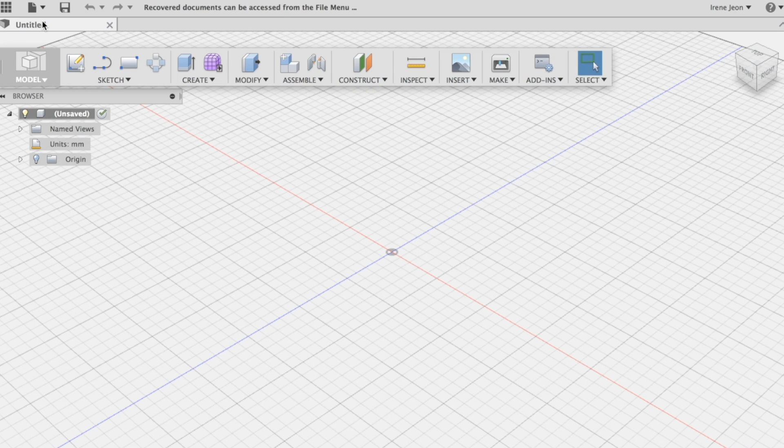So let's get started. I'm going to be using the top plane to make the sketch. I select the plane that I want to work with, which is the top plane. I want the pendant to be about 10 millimeters by 10 millimeters.

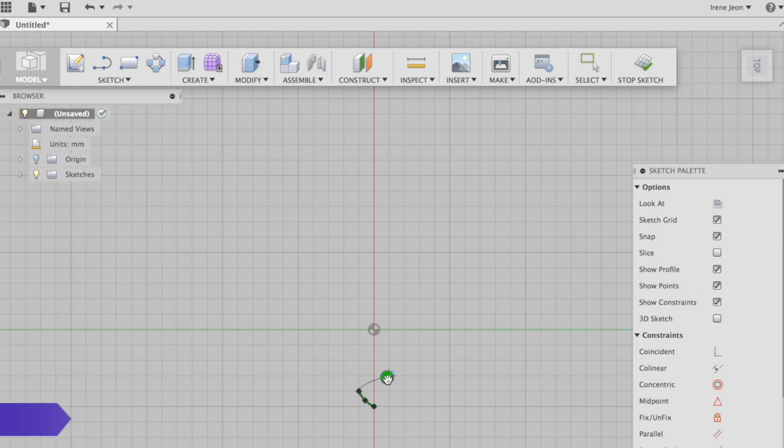So I'm going to pay attention to the rectangle, and I'm going to select the spline tool from the sketch tab and then use the line to create the fingers.

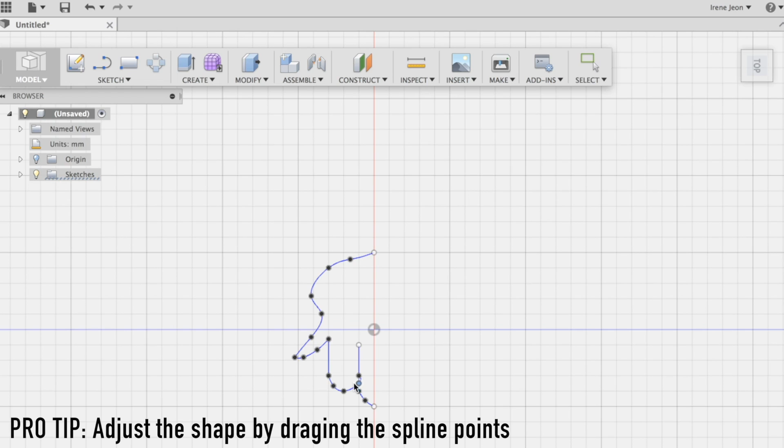After that, I'll be adjusting the spline points to make the hand look better, using the dots to adjust the shape of the hand. I only drew half of the hand because I'll be using the mirror tool later to replicate the other half onto the other side.

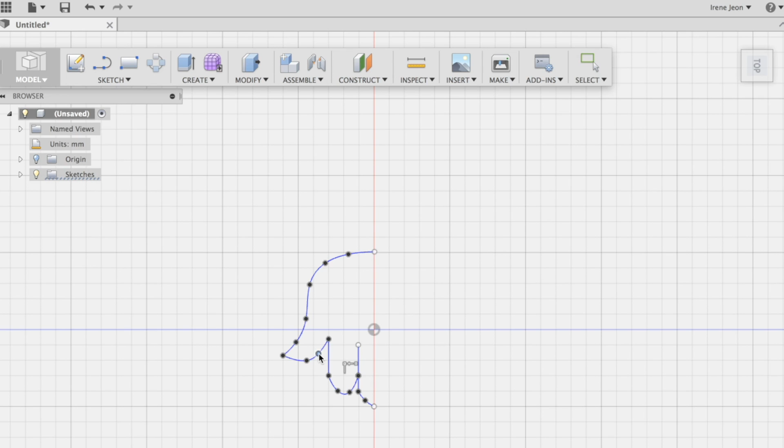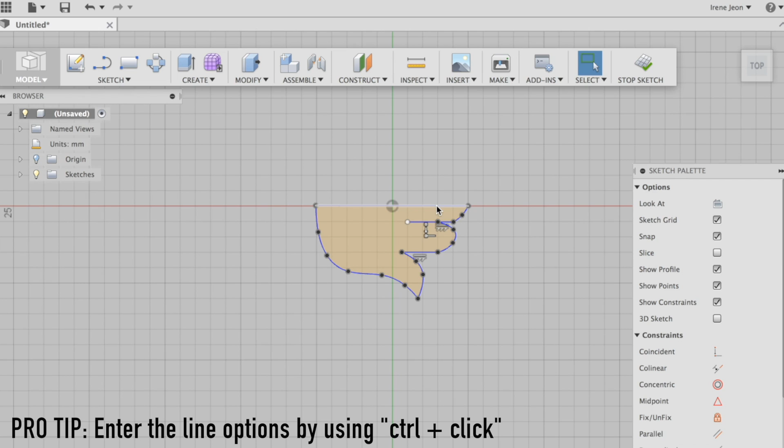We'll now learn how to use the mirror tool. In order to do so, we're first going to sketch a line from the top of the hand to the bottom of the hand to make it a reflection line. So we drew a line and then we're going to select it by using Control and clicking on it, and go down to normal construction.

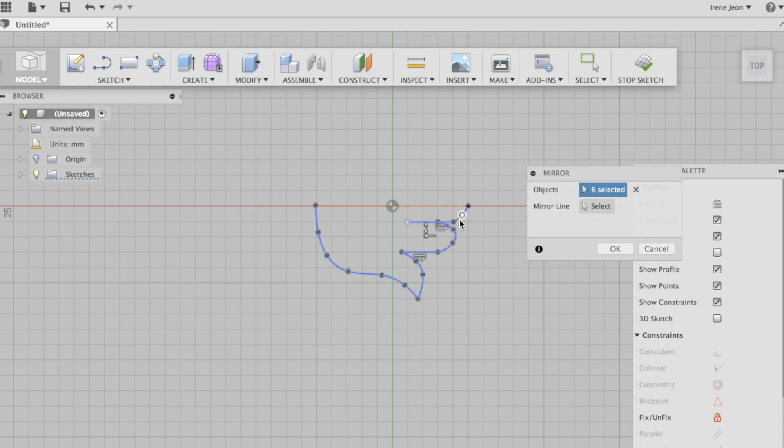Then we're going to go down to the sketch tool and hit mirror, and select all the objects that we drew, so all the lines and splines. Go to the mirror tool again after selecting the lines only, not the dots, and select mirror and mirror line, and hit OK, and you will have created a Hamsa hand.

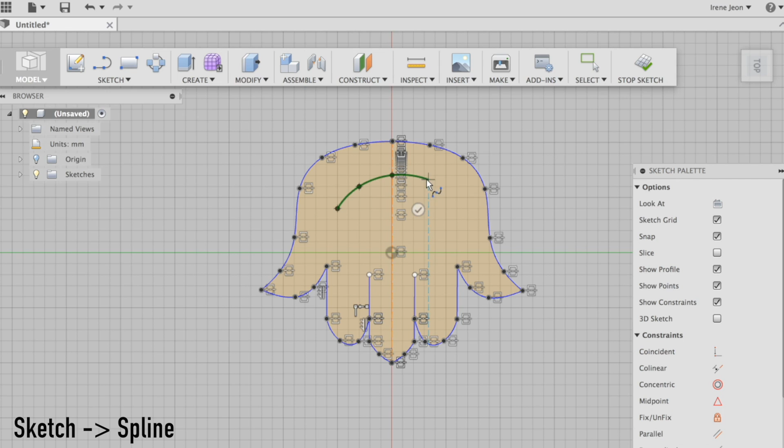Now we'll be working on creating the eye in the center of the Hamsa hand, and we'll be using the spline tool. I'll be using one spline to draw the top of the eye and another for the bottom of the eye, and I'll be adjusting it so that it looks more like an eye.

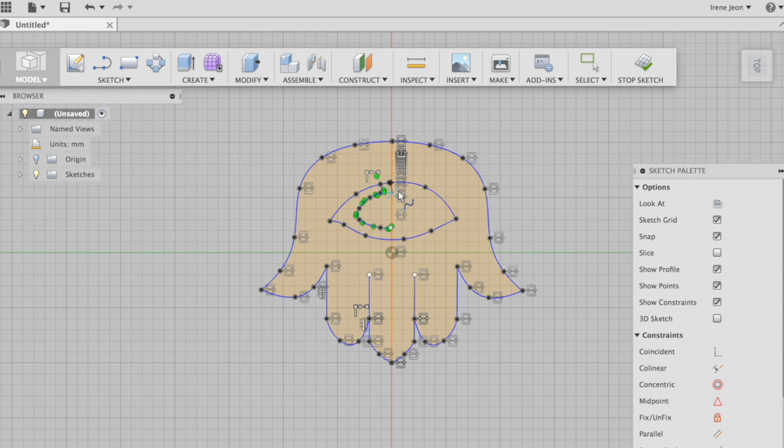After adjusting it, I'll be using more splines to go in and draw the pupil and the iris. But first I need to make sure that the 3D printer will get the pupil and the iris printed, so I make sure to have some kind of path that connects the pupil and the iris to the hand.

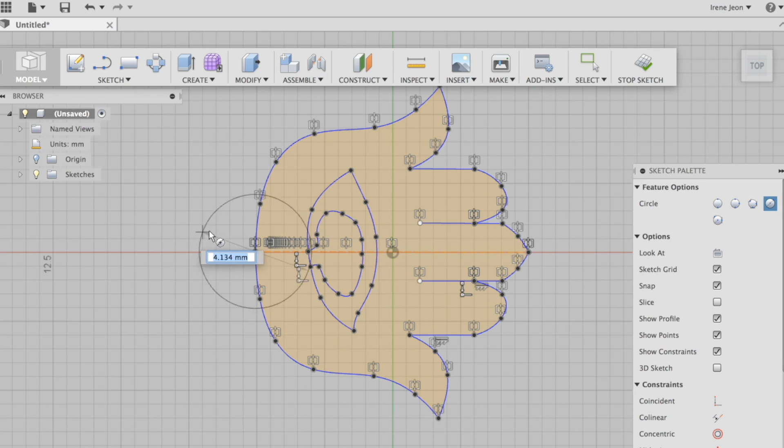Now I want to make sure that I have a ring to put the pendant through, or through the chain. So I'm going to be drawing two circles, one for the outer circle and one for the inner, making the outer one about 4.5 millimeters diameter-wise, and the inner one 3.5-ish, so there's a millimeter difference between each circle.

We'll now be extruding the object, so I go down to create and hit extrude, and select all the parts that I want to be 3D. I hit direction as one side and make it about 3 millimeters thick, and hit OK. Now my object is 3D.

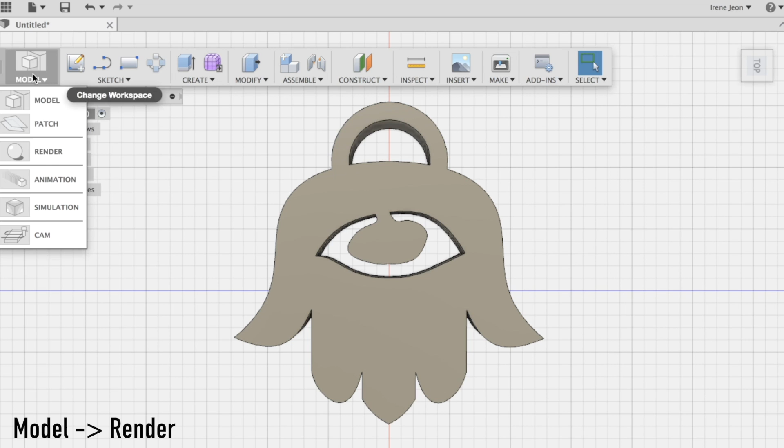We'll move on to rendering, which makes the object look more like a 3D object. So going down to model and hitting render, we'll now enter the rendering space, and I'm going to make the background color white. Ultimately I want to make the pendant a rose gold color.

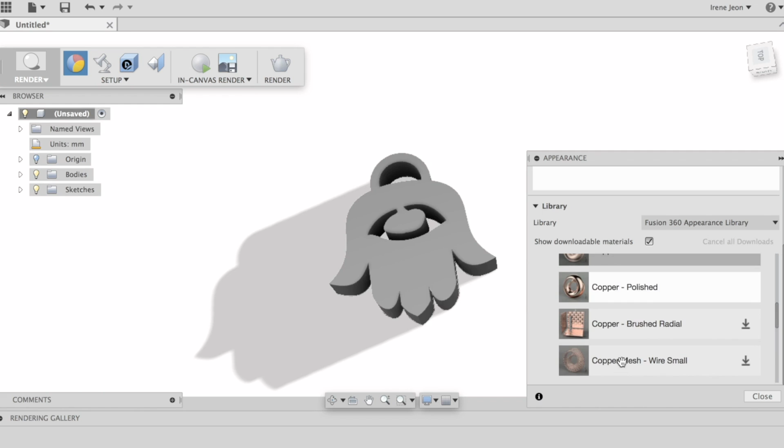So hit appearance, go down to metal, and I'm going to click on copper and copper polished, and drag it onto the object, and start rendering using the in-canvas render.

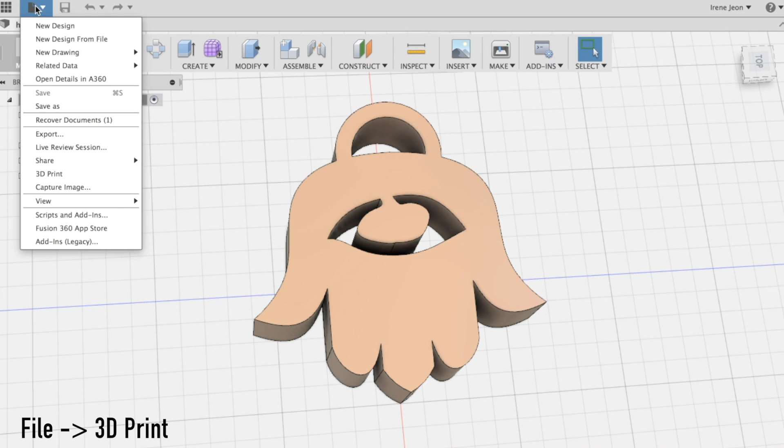Now we'll export it as an STL. I'm going to select File, go down to 3D Print. My refinement would be high. Then I'm going to uncheck the Send to 3D Print Utility checkbox and click OK.

And then I'm going to save it as Hamsa Hand version 1, or name it whatever you want to call it, and then hit save. So that saved it as an STL file.